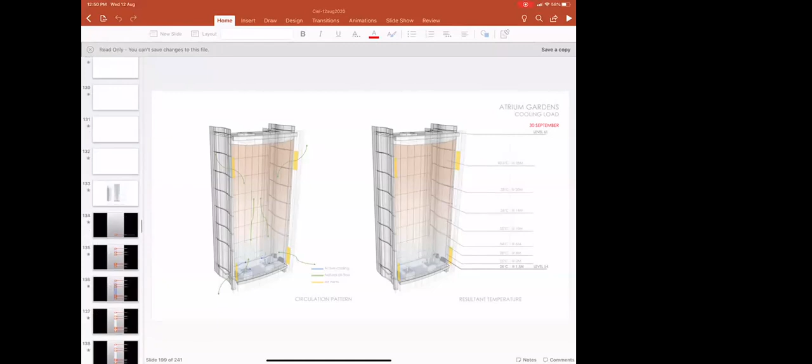Okay, sure. So Chris, at what point did I drop? We lost you on some of the physical model photographs, close-up models. It was about 7 or 8 minutes ago. Okay, so I'll try and pick up where we left off. Can you see something on the screen? Yes, now we can. You're scrolling back. So, did you see the video? No, we didn't see the video. Maybe the video froze it. If you keep going back, we didn't see any of this. Stop! Yeah, we were here. We were just looking at the model photographs. Yeah, I think start there. That's a good place to start.

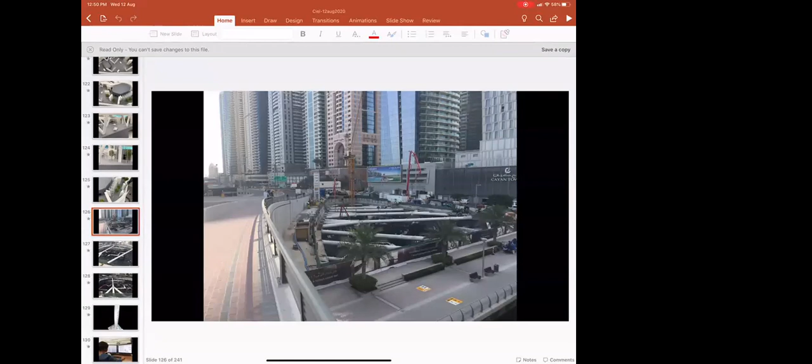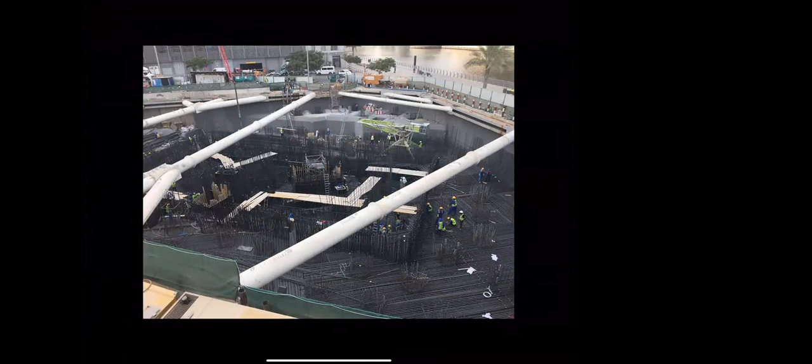Okay, so these are the construction photographs. Did you see these? No, we didn't. These photographs were taken 2 weeks ago, during the first raft pour, and you can see the amount of steel there. You can also see the rectangular shape of the original core, and then you can see the pile heads. And also you can obviously see the bracing to stabilize the foundation walls.

Chris, am I still there or am I disconnected? You are still here.

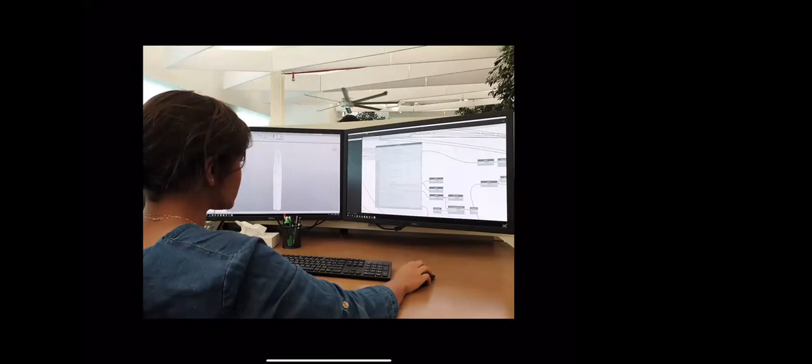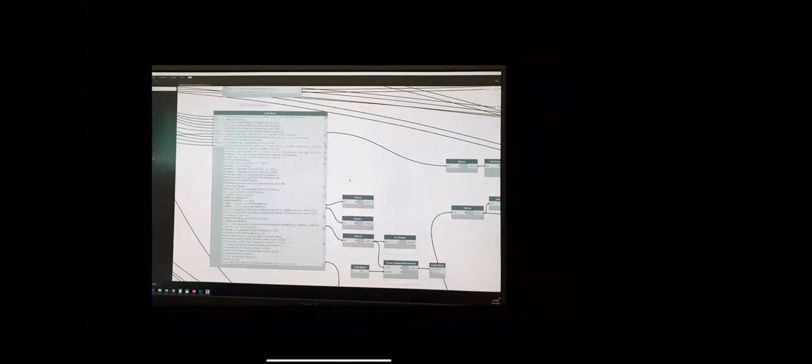And Dr. Naveed, the presentation today is really multidisciplinary. It's to give us a feel not just of the structure, but also of the complexity of designing a project such as this, using, in this case, parametric methods to design and optimize the skin of the tower, because the tower is not a regular shape. It's changing in geometry as it goes up, and the floor plates vary from floor plate type 1 all the way up to type 6 on the drawing.

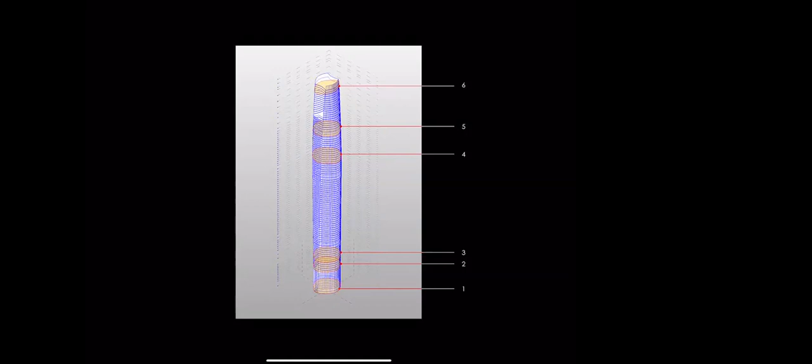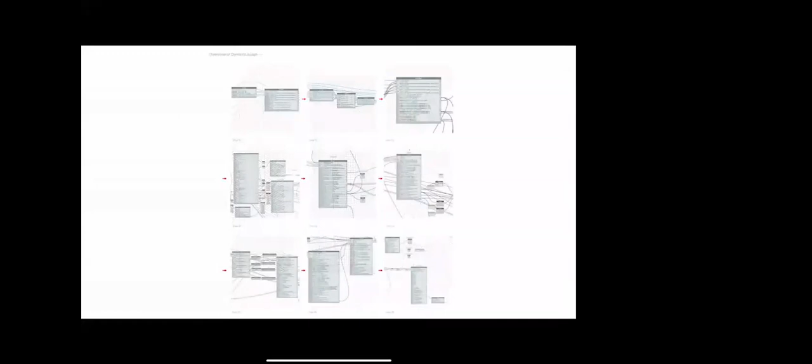One of the challenges is how do we optimize and design an envelope that allows us to realize a glass tower purely through cold bending, so that the glass panels themselves are flat, but when they are brought to site, the panels are pushed physically and one corner is bent back to create a warped surface. Cold bending has very defined limits, and those limits are computationally calculated, and we then create an optimized scheme which has a high level of repetition for economy, but also maintains the design intent of a tapered building.

Using computational methods, in this case 3D modeling in Revit of the tower, was super important, because no two floor plates are the same. Every floor plate in this building is unique. We use computational methods to generate the shape, and then Revit modeling to produce the drawings, so that the drawings are a byproduct of the modeling.

Chris, has the team seen any of these views of the building? No, I don't think so. This is all new.

Chris, am I still online? You're still there. You're still online. That's good news. Thank you.

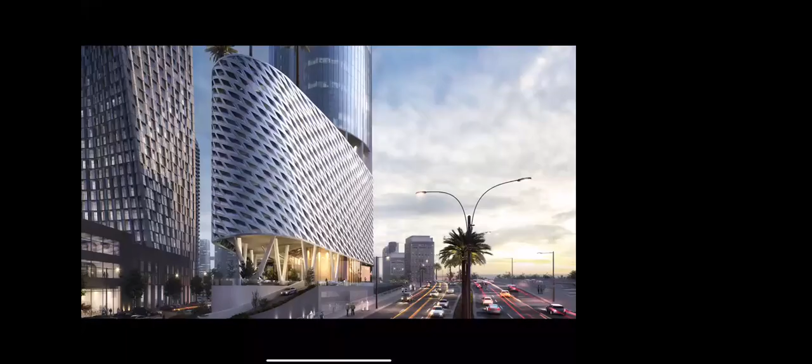So there you have it. It's still early days. We have a 3-year construction program for the project. It's a glass-clad project. These are some early renders that show you where we are heading. An observation deck at the very top of the tower with an infinity edge horizon pool, we call it, and a second pool at level 78.

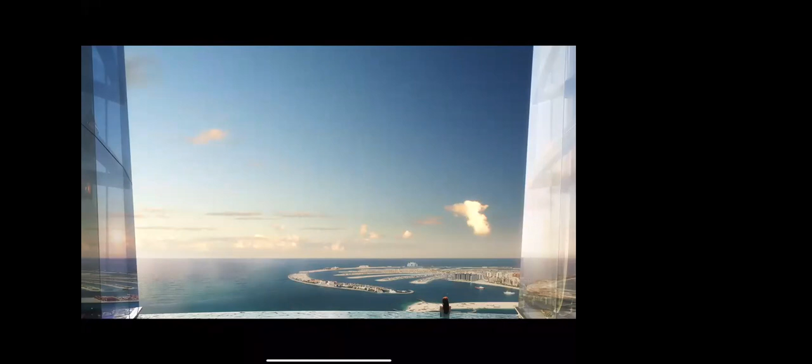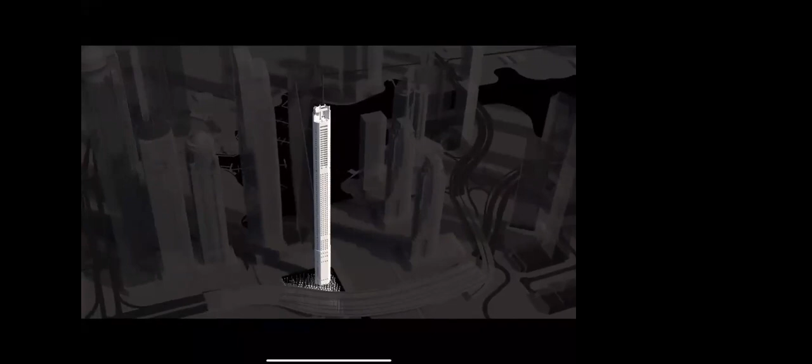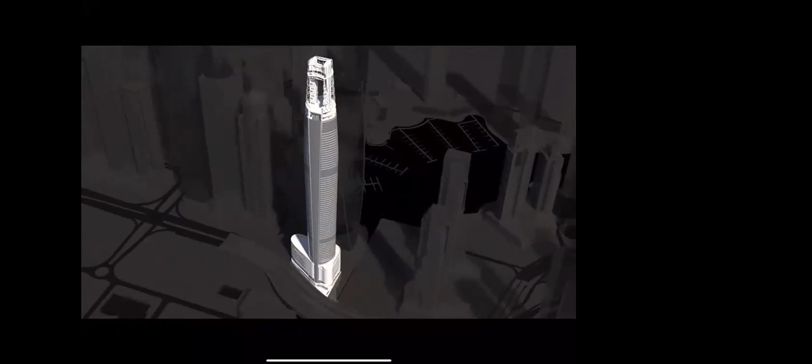And thinking about the construction sequence then: a slip-formed in-situ concrete core, outrigger floors, steel structure at the very top, and then the floor slabs, and you can see the atrium gardens. There's 12 of them. And then, of course, the challenge of how to wrap the skin on the project. Yeah?

And this process of going from a relatively simple rectangular building to a much more complex project is not always linear. The process itself has a life of its own, and really, as designers, we are always looking to see how we can respond to existing conditions.

In this case, the fact that the piles existed in the earth, they were designed for a tower with 2 rectangular cores and a raft. And our scheme, of course, is different. The scheme is for an oval-shaped core, an oval-shaped tower, basically sitting in the same location as the original scheme.

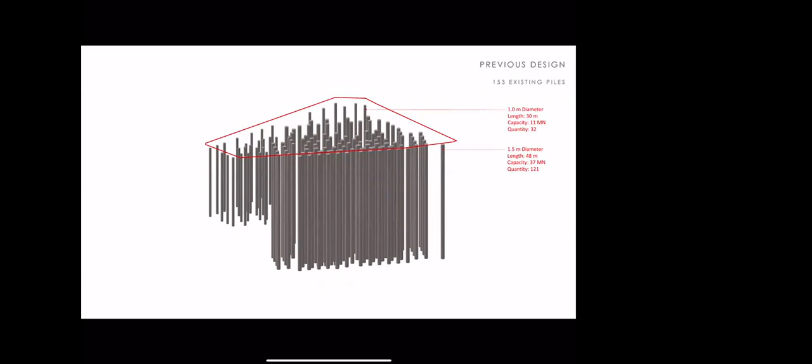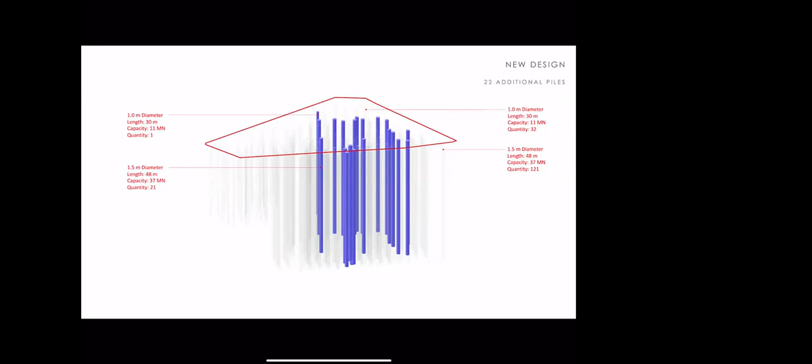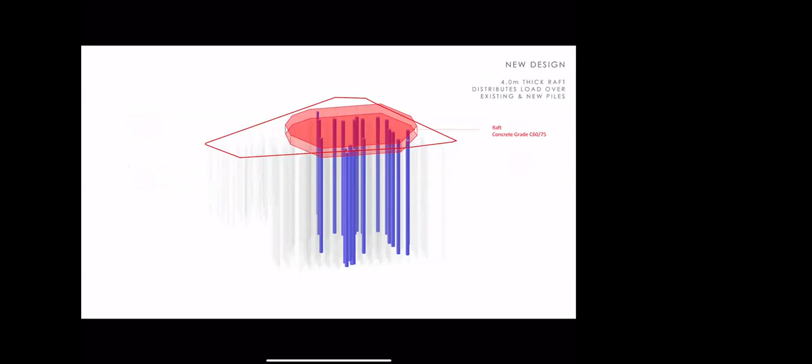But because of this specificity and the fact that the building is about 100 meters taller than the originally designed building, we discovered very soon that we would need to sleeve in and embed within the piles an additional 22 piles. And these vary in diameter from 1 meter to 1.5, length from 30 meters to 48 meters. And then to cap it with a deep raft that will distribute the loading of the newly shaped tower onto the foundation. And our engineers can talk more about this than I can.

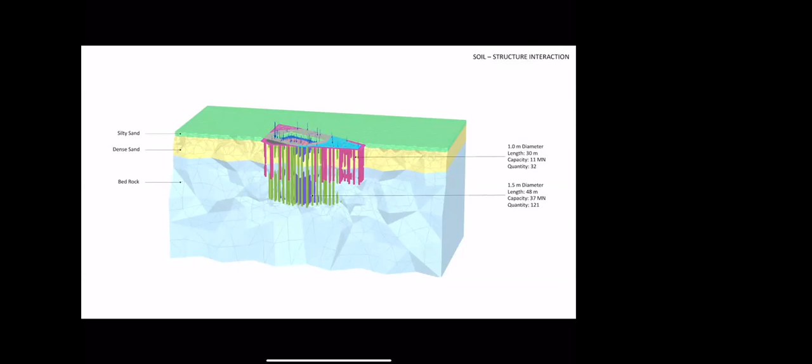And I'm hoping Danilo, if he's there, and Tuk, can answer some of your more specific questions on how we dealt with this. But we took it on. We understood that our decisions related to the tower would have challenges for us in terms of what's already there. And we dealt with that, I would say, with determination and with a very fine sense of how to solve the problem.

Chris, in case I get disconnected, will you call me on my mobile? I think that would be the best way forward. I will do. Yeah, okay.

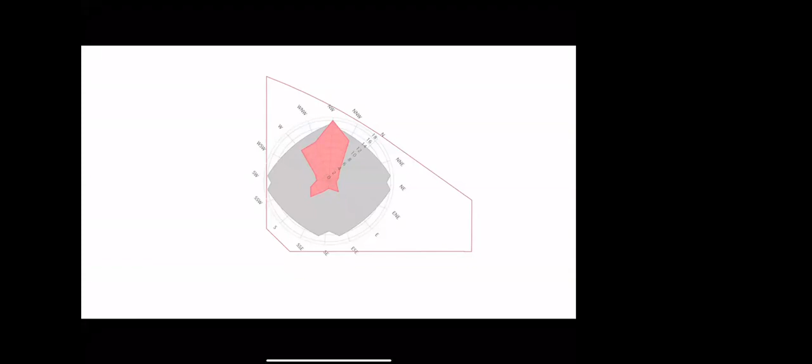You're still going. So wind, there's a very strong and predominant sea breeze that arrives at the site from the northwest. And in our early studies, we took on some very rudimentary computational fluid dynamic studies where we tested various shapes for the project. At that time, we thought the building would be about 340 meters. It's changed a bit now, it's about 365.

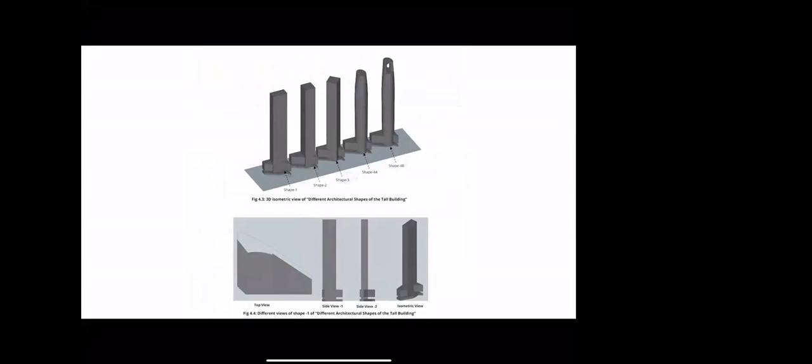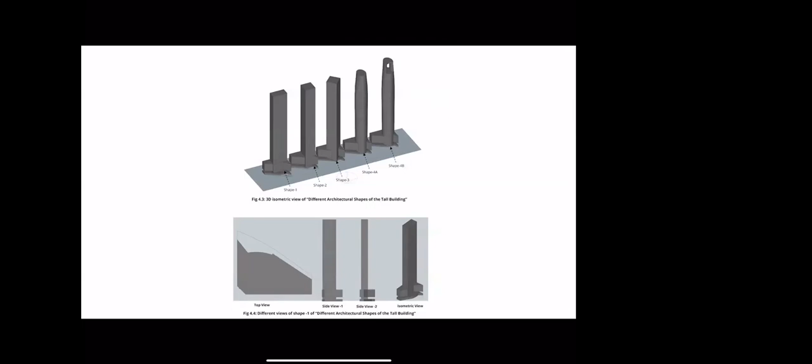But the early rough analysis compared the originally shaped rectangular tower, which you see on the left, to the more tapered oval-shaped tower. And as you would expect, we found that a rectangular tower facing the incoming breeze created tremendous vortex shedding on the leeward side. And with that, obviously, the need for more structure to stabilize the building from its own dynamic oscillations as a result of the vortex shedding.

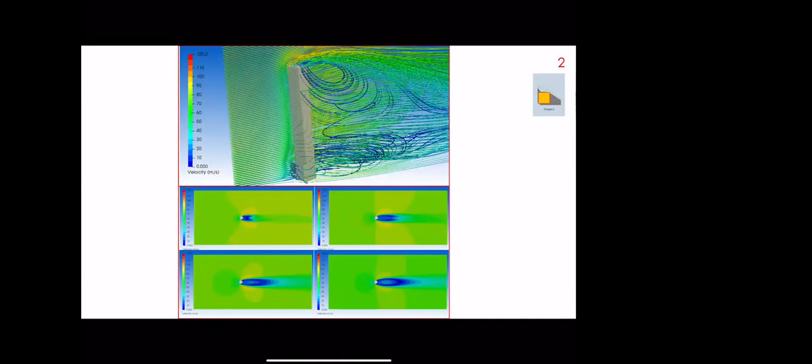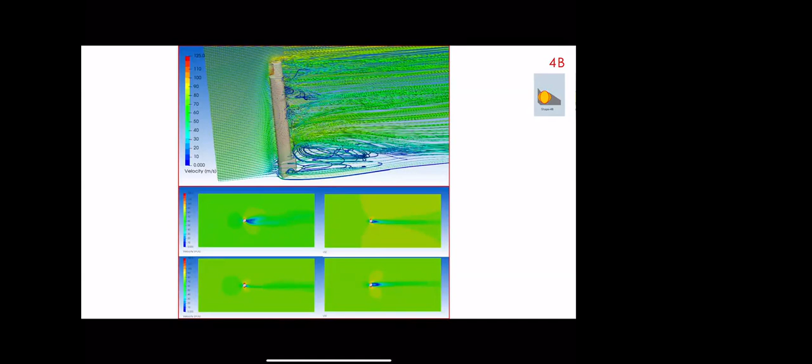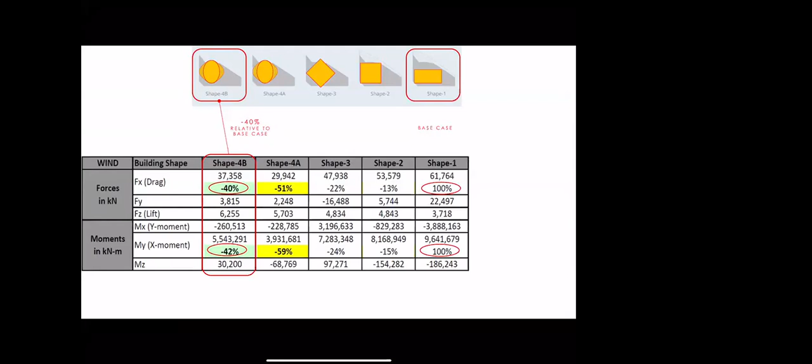And then we tested different shapes, square, a rotated square, eventually an oval, and then an oval shape that is actually tapering. And you can see that there's a dramatic change in the vortex shedding profile as we moved away from a rectangular shape to this more fluid shape. And the early data showed that in terms of forces and moment, there could be a 40% reduction as we optimized the shape of the building, as we moved away from a rectangular to this oval-shaped building from the base case.

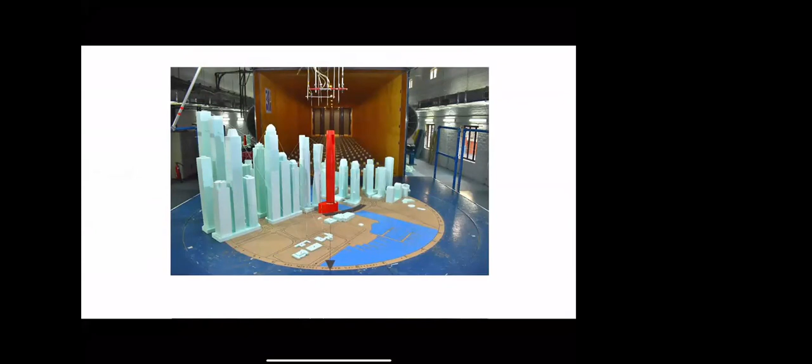We then worked with RWDI for extensive wind tunnel testing of the project. This is the wind tunnel in Canada, and their analysis again reinforced and corroborated our earlier analysis in terms of the efficiencies that come from the shaping of this building.

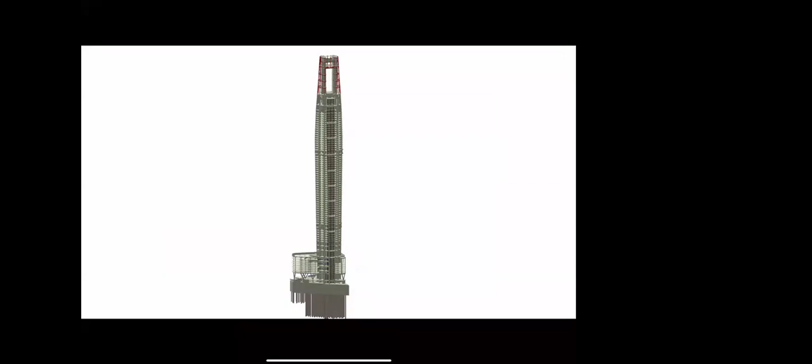The project is modeled three-dimensionally in Revit, and we model all disciplines: architecture, structure, mechanical, electrical systems, and even interior design, because that integration of the different disciplines becomes a key to producing a set of documents and to producing a design that actually works.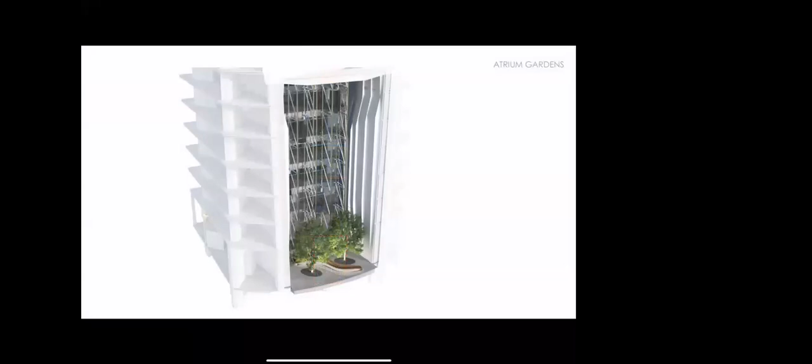And then the idea of these gardens, these naturally ventilated landscape spaces that are stacked vertically on the ocean-facing side of the project. That's been a very exciting exploration for us, because these spaces are not air-conditioned, they are comfort-cooled only where people are, in their comfort cooling zone. And by doing that, we have been able to achieve fantastic savings in terms of the cooling load on the project. And our energy consumption is significantly below the Dubai mandated energy code.

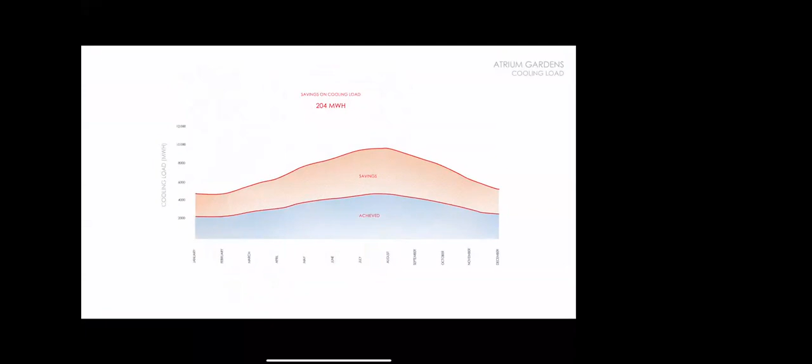And we've been able to do this because early on, we recognized that these gardens should be such that we cool where we need to, and we allow for a vertical temperature gradient through the space, which could be as much as 14, 15 degrees in March. And then in the height of summer, you can see that the temperature gradient is even more.

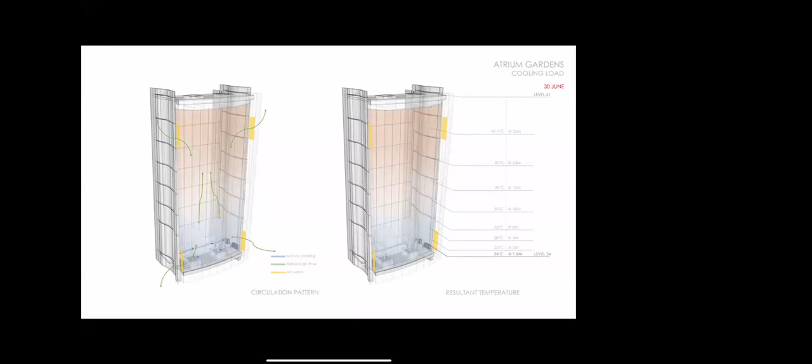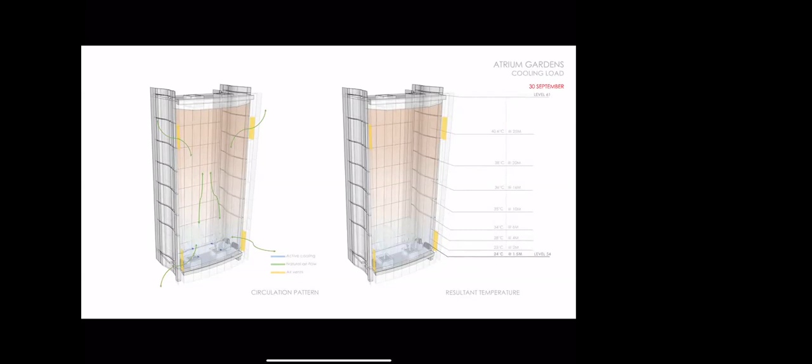It's about 17 degrees between the 24 degrees where people are to the very top. And by designing the project to allow for this, i.e. by having the insulated thermal enclosure set into the building rather than on the face. The face of this atrium is uninsulated glass, whereas the insulated envelope is behind the atrium. That has allowed us to propose these really exciting shared spaces, but without huge operational costs related to maintaining them and cooling them in this environment, very harsh summer environment.

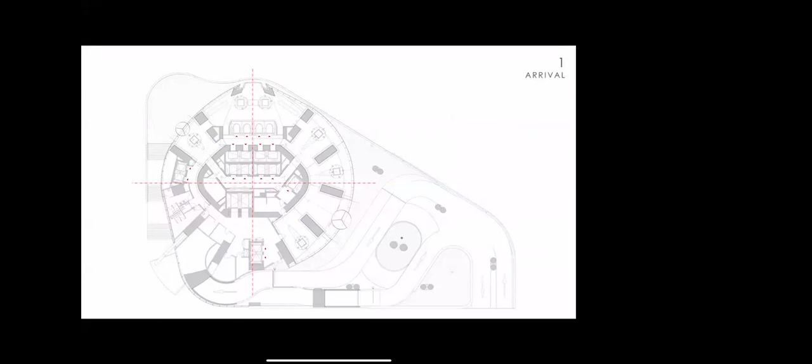I'm just going to scroll very quickly through the plans. You can see the shaping of the building. It's a symmetric structure with a central core and radial shear walls. And then of course the slab edge changes as the shape of the building changes. And the shear walls themselves are translating a bit along the axis as the shape of the building and the geometry adjusts. And this is the very top of the tower with the observation deck.

The elevatory is, I think I've lost the PowerPoint again, Chris, for some reason. Yeah? Chris, yeah, are you there? It's coming back. Yeah, you're just refinding it again. For some reason, the PowerPoint is tripping. I'm not sure why. But let me try and get back, and then let's open it up for a Q&A. You've gone past. You've gone past.

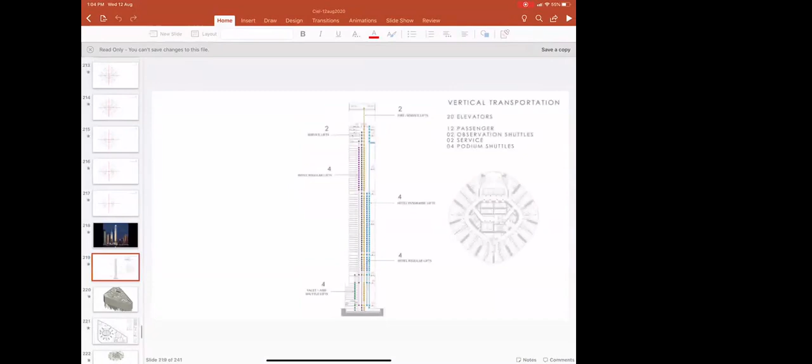So we were looking at the elevatoring strategy. There are 20 elevators in this project, four elevators within the podium to low-rise and high-rise. And we've spent a lot of time looking at that aspect.

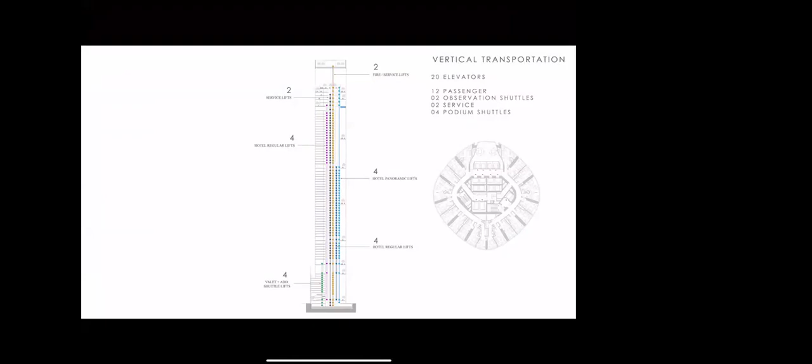I think I lost the PowerPoint again. Yeah. Let's just wait for it to catch up. No, it's tripping. Yeah. So why don't we open it up for discussion, if that's okay? Yeah. So I apologize for the technology. This seems to be an issue. Chris, are you there? I'm here. Yeah. Okay.

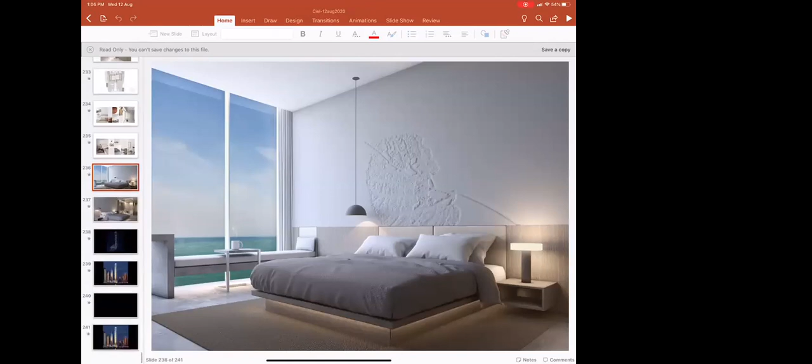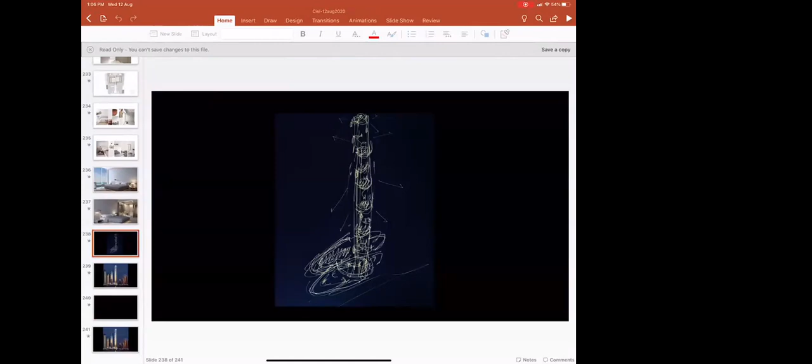So, Mr. Yahya, if you want to start that discussion with Dr. Naveed and Engineer Hosi. So let me introduce Engineer Hosi C. Mr. C is CEO and President of Sy Square Plus Associates from the Philippines, which is a structural consulting firm, and he has done several tall building projects in Metro Manila and in other cities of the Philippines. Yes. So let me start with Dr. Naveed for his opinions and questions on structural design of a steel tower.

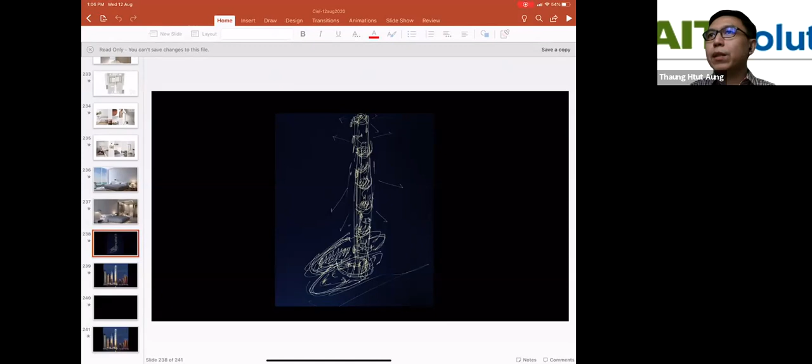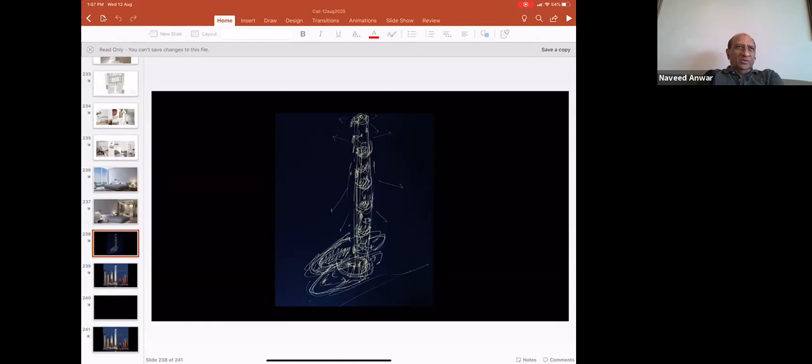Great, yes, thank you so much. First of all, I would say, thank you so much. Really, it was amazing how the project has shaped, and to be able to see the project process through the eye of the designers and the architects unfolds a lot of things that we never get to see in the final product, and to be able to be part of that process is a privilege and an honor. I personally enjoyed it very much. And thank you so much for sharing this with us, especially a project of this kind, where the original design was already done in a different form, with the foundations there.

Normally if somebody comes to us and says we have a building, would you mind adding 100 floors or 100 meters to it? I don't think people will take that seriously. They think, well, what are you talking about? The foundation is already done. Maybe we can add a few meters, but not 100 meters. So it's a really amazing challenge that your team has undertaken, especially how it transformed the form from a rectangular to such a beautiful one architecturally, as well as, as you've shown, from the engineering point of view, the wind balancing of the shape and everything. So I think it's a fantastic project for us to witness.

So I think the main objective of our talk has already been achieved, because you have very clearly demonstrated how the project concept develops and how different disciplines come together to create a masterpiece like this. And it clearly also shows that the structural challenges were a major part of that.

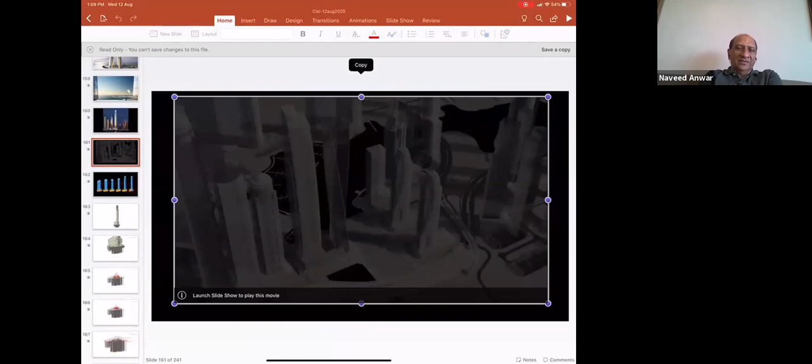For the benefit of our participants, if your team or yourself could elaborate a little bit on how the structural system itself was developed in terms of the interaction between the core and the outer shear walls, and how the location of the outrigger floors was decided, because that's always an issue for engineers, and whether it fits with the architect's vision. So if you could say something about the outrigger floors, how they were selected and positioned, and how they accommodated the structure as well as other needs. Okay, so I'm not sure if Danilo is on the call. Danilo, are you on the call by any chance?

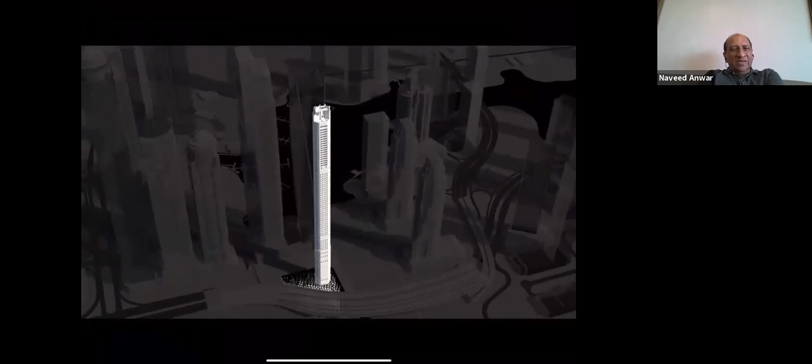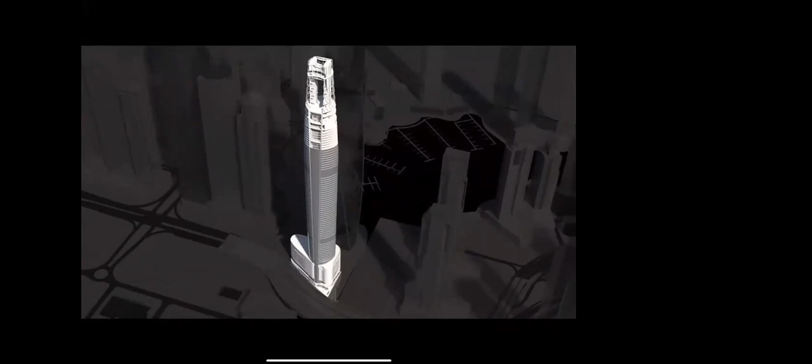Actually, yeah, Mr. Danilo, I think I didn't see his name, but Bui Tuk is here. I think Tuk is here. So Tuk, I'm running. Can you see the video that shows the structural concept and then the outrigger floors? Can you guys see this video? Yes, we can see that. Yeah, we can see that. We can see that. Okay, great.

So Tuk, could you talk a bit about how we evolved the structure and the one-third locations for the outrigger walls? Yeah. So my name is Tuk. I'm the structural engineer for the project, and our structural engineers have been working very closely with Yahya, shaping the tower. So when we look into the existing design of the building, I mean the existing piles,

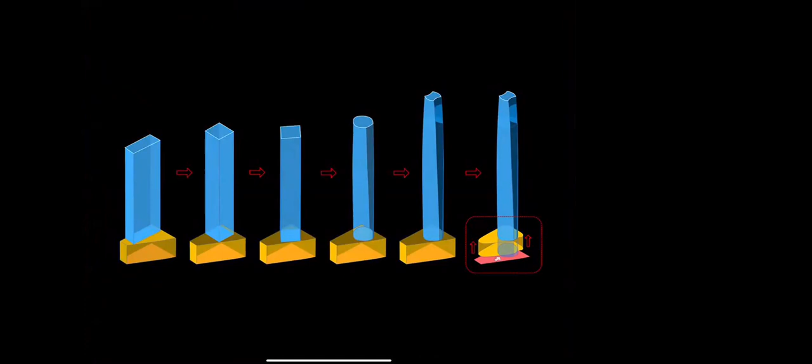we knew that in order to do a 365-meter tall tower, we really need to optimize both the gravity loads and the lateral loads. So for the gravity load, we're looking into reducing the partition loads, optimizing the slab thickness in order to reduce the reaction at the base. We knew that we wouldn't be able to do much about the thickness of the core walls or also the shear walls.

To reduce the lateral load acting on the building, we worked with the architect, shaping the tower and making it very aerodynamic in order to reduce the wind load. For seismic, besides reducing the gravity load, which directly affects the amount of seismic force acting on the base, we also conducted a site-specific study to determine the level of seismicity at the location of the tower.

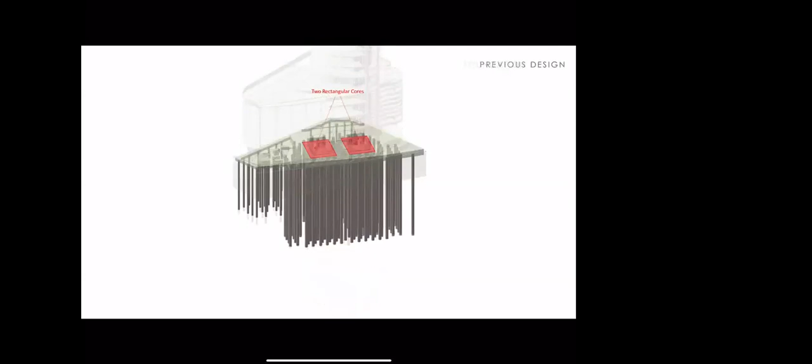We work with architects and vertical transportation engineers to shape up the core. It's one of the very important elements of the structure. We work with the interior design, layering the radial shear walls at the perimeter, and along the height of the tower, we have provided 3 outriggers with perimeter reinforced concrete belt walls, very well integrated with the MEP systems.

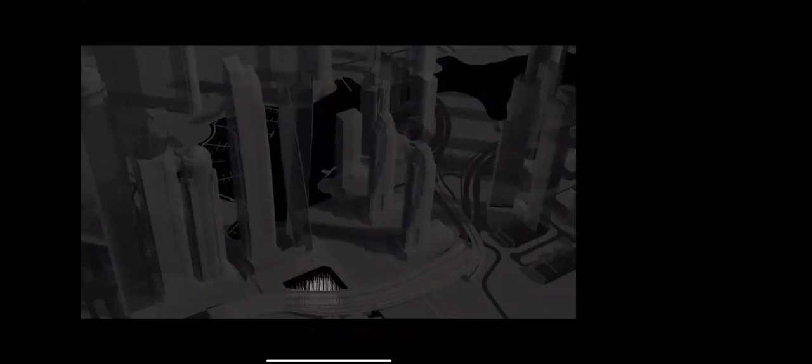So if I have to say a sentence about the structural system for this building, it is the building wall system enhanced with 3 levels of reinforced concrete outriggers and belt walls. Yeah, thank you.

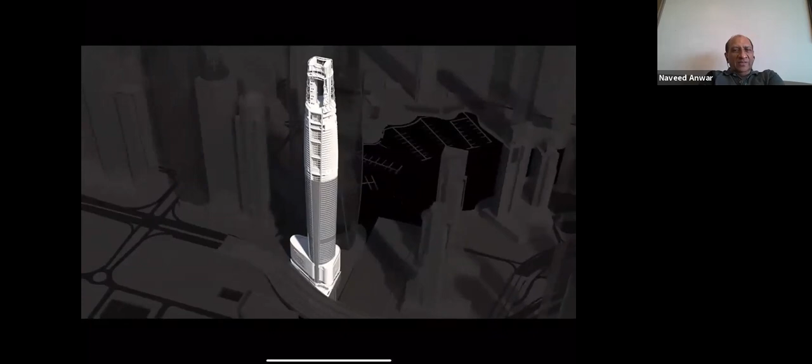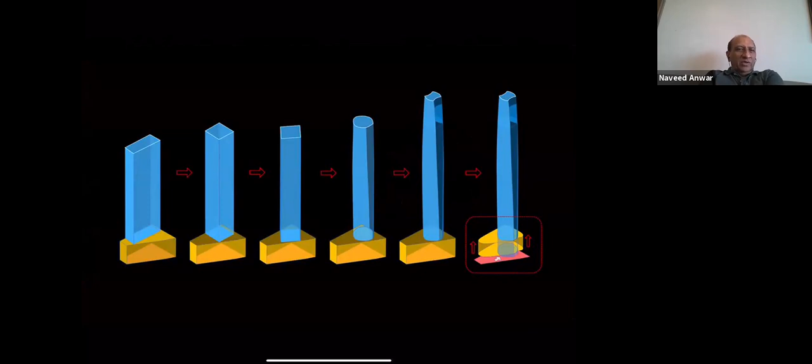Thank you so much, Mr. Yahya. It's really an honor for us that Engineer Bui Tuk, the designer of this building, is also with AIT and taking our professional master's program in tall buildings. So we are really honored that designers of this caliber are collaborating with us. I think I will pass the floor to Boise. Yeah, thank you so much, Dr. Naveed. Thank you so much also for the great presentations.

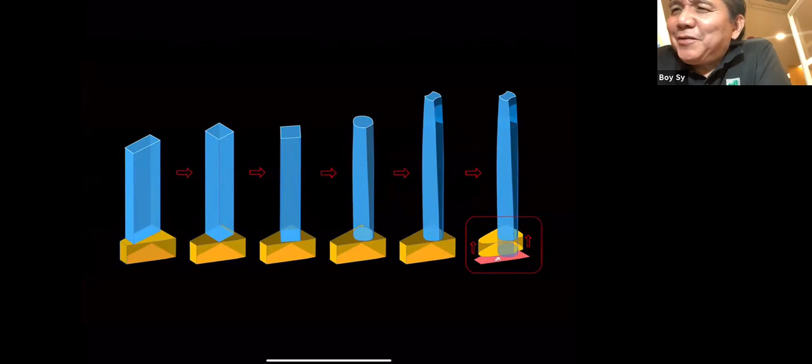So it's always a dream of a structural engineer to design a building of such a height, more than 360 meters. In the Philippines, you're only designing 270. So I was amazed, just because of shaping the tower configurations, correct me if I'm wrong, you were able to delete the need for any dampers, right? There's no dampers, only outriggers. Yeah. There are no dampers. There's no TMD requirement. No dampers.

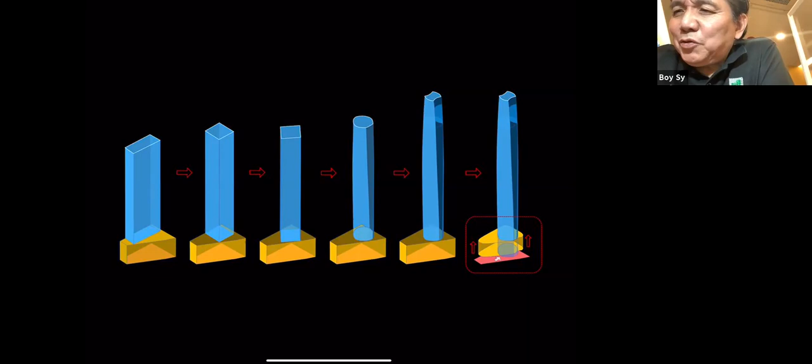Just the core alone plus the radial shear walls, and you're able to shape the perimeter, the shape of the tower, and address the wind loads, right? And that's the reason why you don't need any dampers, simply because of this technique that you actually did, which is actually quite amazing. Yeah. Thank you so much.

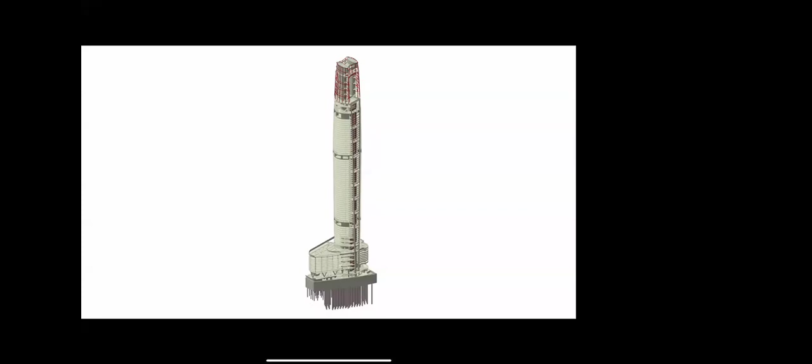I just want to add a note here. When we look into the wind design, we knew that our architects wanted to have an observation platform on the very top of the tower. So we've been working with the designer to open up the crown of the tower in order to reduce quite significantly the amount of wind load for the top part of the tower. And it has resulted in an elegant design, but also an efficient structural system for the crown.

Yeah, thank you. If I may, once again, Mr. Yahya, I must say that the way you have presented and developed this project is really very instructional to a lot of us working in this field, especially your focus on collaboration and on getting the final solution through all these steps. And I think this is the main learning experience for all the participants that we have actually witnessed today.

Most of us engineers normally attend conferences and presentations from other engineers, and we rarely get to see how the project actually is developed from the architectural side in a more integrated manner as you presented. So this has been a really amazing experience for me personally, and also for the participants.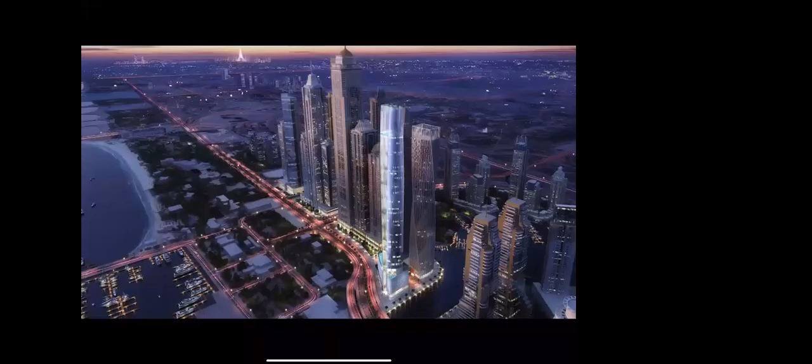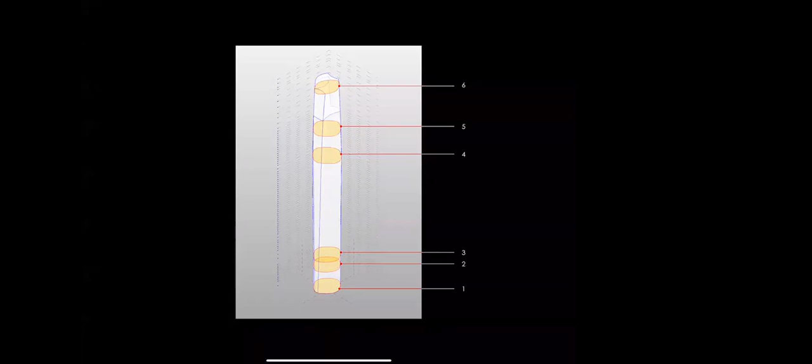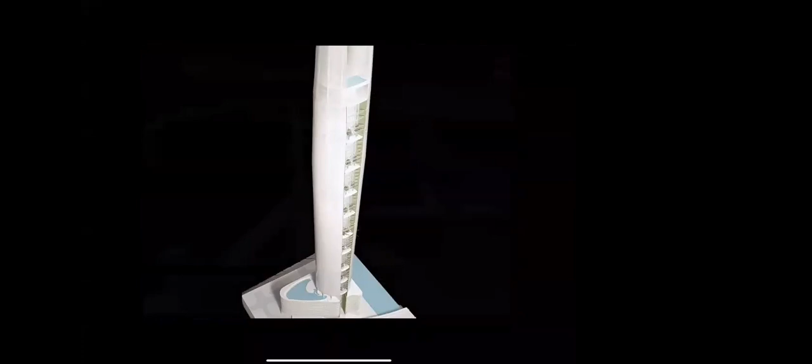Thank you, I'd like to answer this question about the foundation. But before speaking about the foundation, I'd like you to know that when we worked with the architect on the design of this tower, at the very beginning we requested them to consider drywall systems instead of masonry or block work, which would be much heavier. So all the partitions on the typical floors are made of drywall. This allows us to bring the supported load significantly less than a conventional design in any building in Dubai.

The second item we optimized was the floor plate itself. We looked into various options, working with the best post-tension designer in Dubai to arrive at a very thin flat plate for the typical floors. We also looked into voided slab systems using Cobiax plastic former. We compared different systems and finally adopted the post-tension slab for the typical floors in the tower.

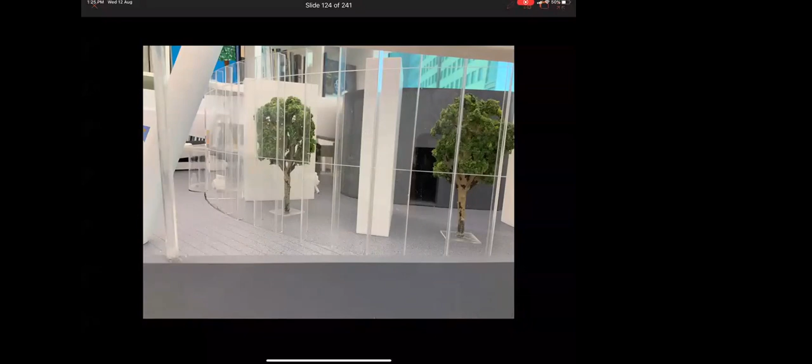By making the tower aerodynamic, as shown in some of the charts Yahya presented, we were able to reduce the amount of wind load in the tower by almost 40%. All of these factors affect the tower foundation. Even though there were a lot of existing piles on site with very high capacity, each pile has a compression capacity of around 37,000 kilonewton.

However, since our tower core is not exactly in the location of the previous cores, we faced some issues—some piles were slightly overloaded—so we had to add 22 additional bore piles with the same length and same diameter. For the foundation design, we worked with a specialist geotechnical engineer in New York, the company Langan International.

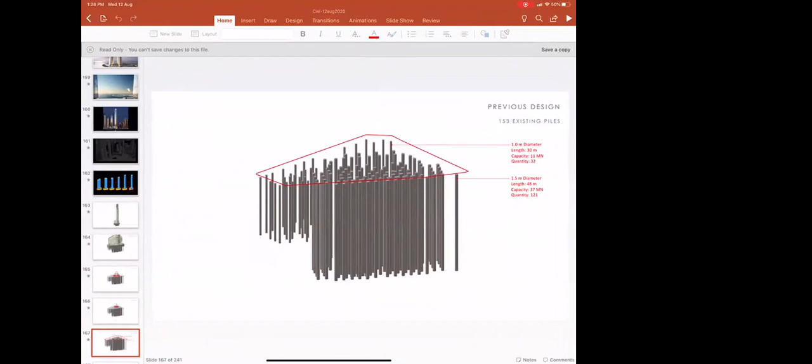We did a lot of iterations between the geotechnical engineer and structural engineer to arrive at precise and efficient spring stiffness for each individual pile. In this tower we have a total of 175 piles. The piles under the tower are 1.5 meter diameter, 48 meters deep, and under the podium, piles are 1 meter in diameter with a depth of around 30 meters.

Thank you so much. Next question: which loading is governing the design, wind or earthquake?

Thank you. So in Dubai, the seismic level is very mild—it's even lower than the moderate seismic zone. So for this tower, wind is the governing lateral load.

Okay, thank you. Next question: was performance-based design considered in the design? So we were thinking about doing a performance-based design for the tower, and we actually discussed this with Yahya at the beginning of the design.

As you know, in Dubai and the UAE, performance-based design has not been adopted as an alternative approach to code-based design. We believe in the new technology of performance-based design for super tall buildings, but building officials in Dubai have not adopted it as an alternative for conventional design. So what we proposed for this project is to do a design that meets all the requirements of the building officials and local authorities. At the same time, we conduct a specific site study for the seismic level. This was also done by Langan International in New York. We obtained the specific response spectra curves for the site with the accelerations, and a full set of ground accelerations suitable for the local geotechnical conditions.

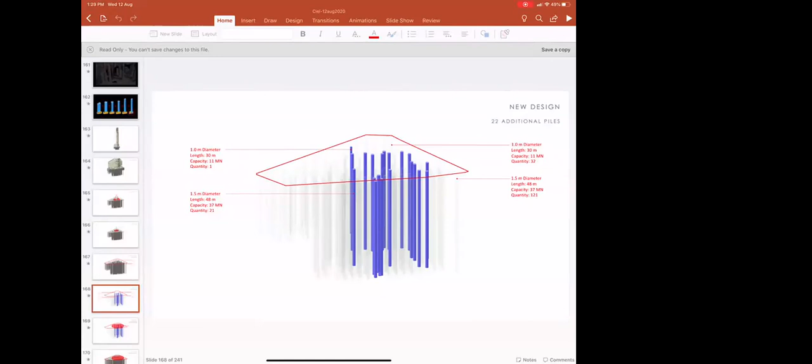Another question is, how about the solar gain? How did you monitor the solar gain for the project? If I'm not wrong, the wider portion of the tower is parallel to the southern side with maximum heat gain.

The tower is basically an oval-shaped floor plate, and we have clad it in a very high-performance silver reflective glass, a kind of leading-edge 21st century glass technology. The main issue then became the atrium in terms of solar and heat gain, because the atrium glass is uninsulated, whereas the rest of the tower has very high performance glass.

We dealt with that through the environmental modeling that I showed you. Overall, this project is tremendously efficient in terms of cooling loads, about 20 to 25% more efficient than the existing Dubai Energy Code, which is itself a very stringent code in terms of watts per square meter. I don't have all the detailed calculations, but we have been able to achieve our goals and exceed the code on this.